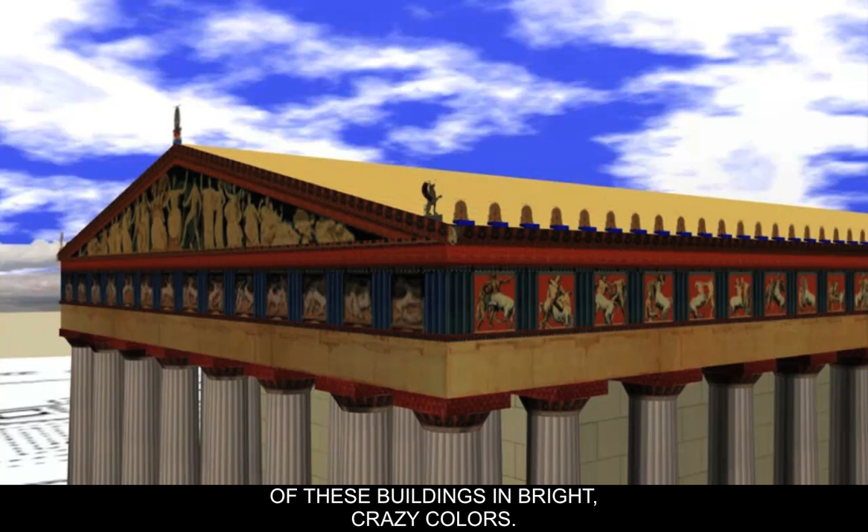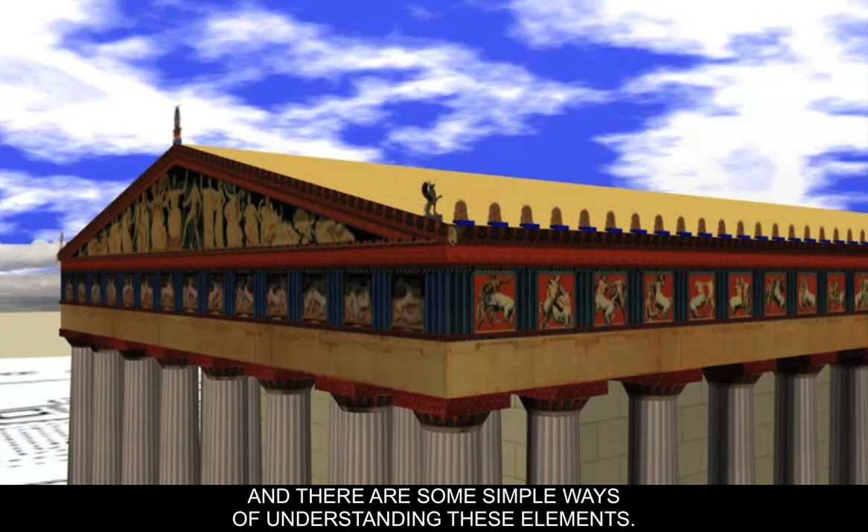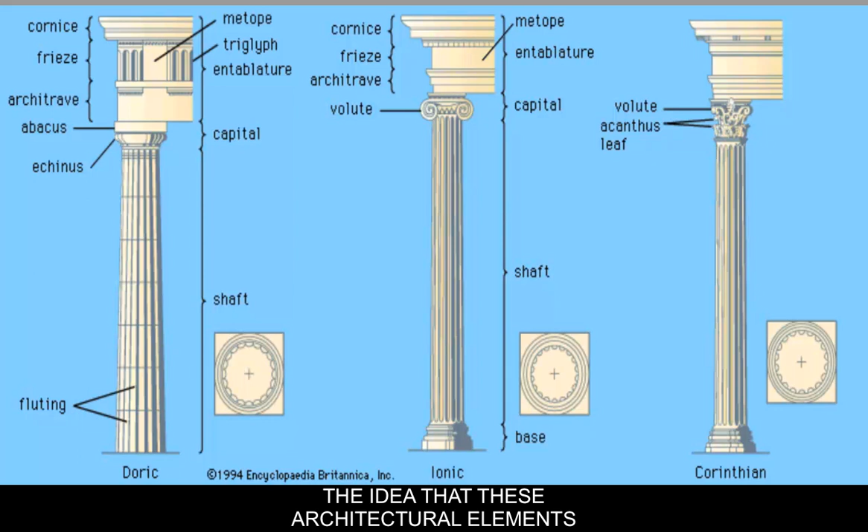So in order to understand the classical Greek world, we need to take a look at some of the architectural elements. And there are some simple ways of understanding these elements. Now, the diagram we're looking at is really important. These architectural elements are things that you have to memorize for your class, and they will give you a lot of enjoyment when you're looking at things later. I know that you probably don't want to hear that, but first of all, we have three main architectural orders.

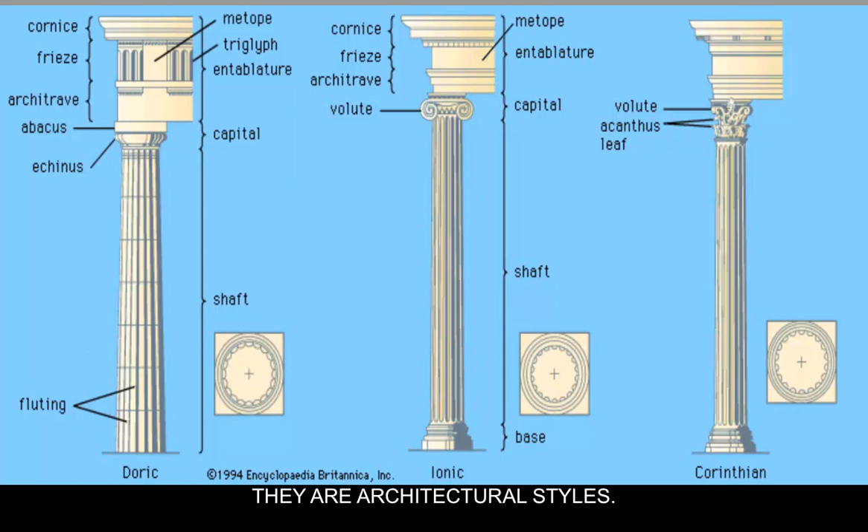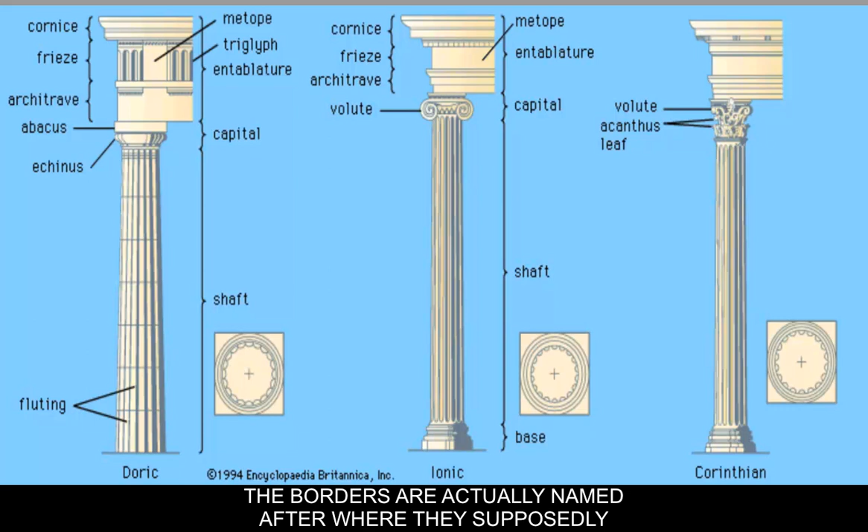They are architectural styles, and the term for column in the Greek and in the Latin world was stylos, S-T-Y-L-O-S. And that's where we get our word style. So these are styles of columns. The orders are actually named after where they supposedly came from: Doris, Ionia, Corinth. Those are names of places.

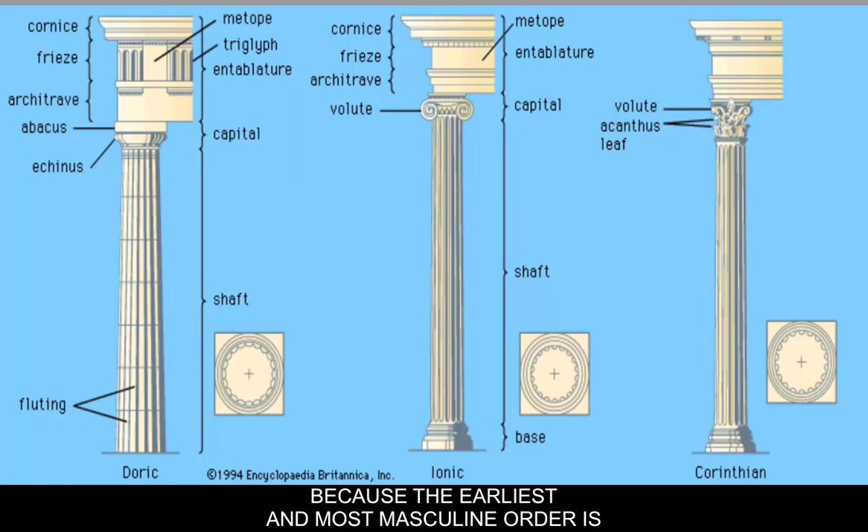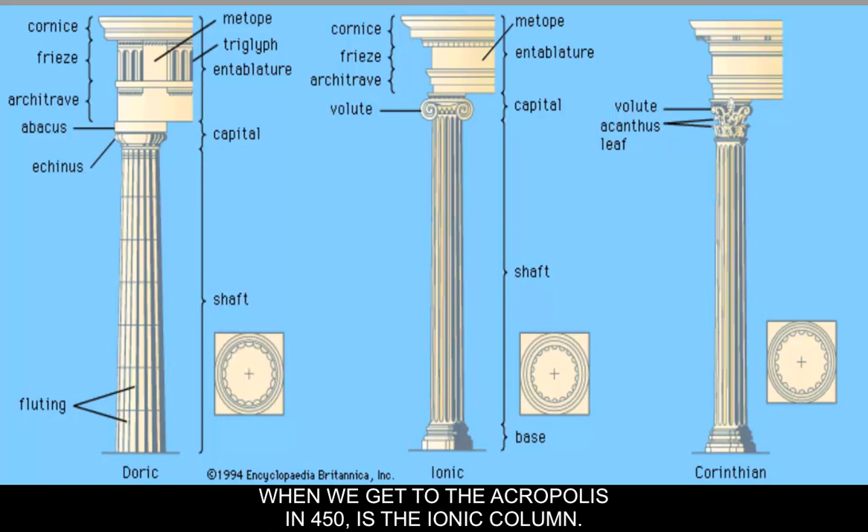Now, this also shows kind of an evolution, because the earliest and most masculine order is the Doric order. The later kind of column that we see, especially when we get to the Acropolis in 450, is the Ionic column. And then much later, around 350, we have the Corinthian order, which is really over the top and has a fancy sort of capital on it. So let's analyze these things and talk about them a little bit.

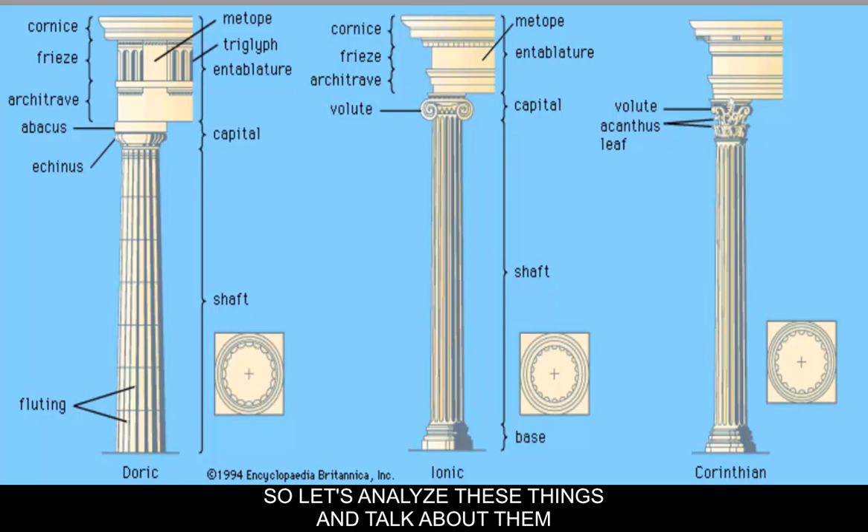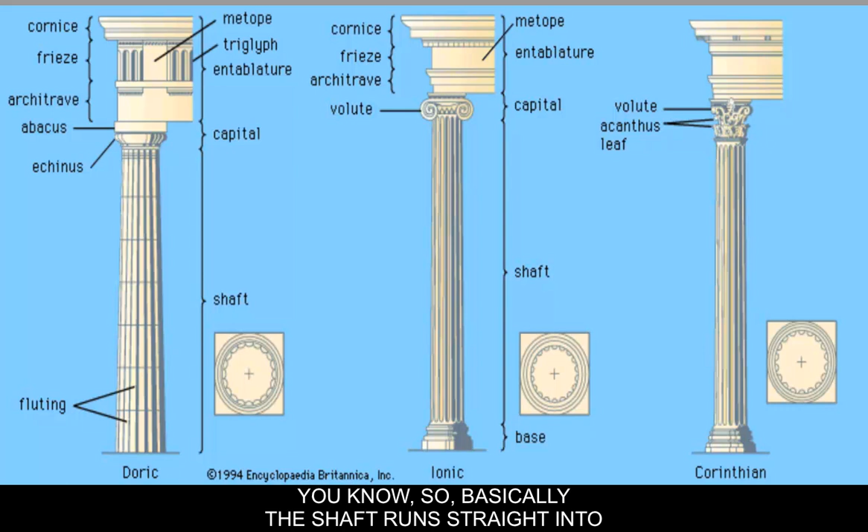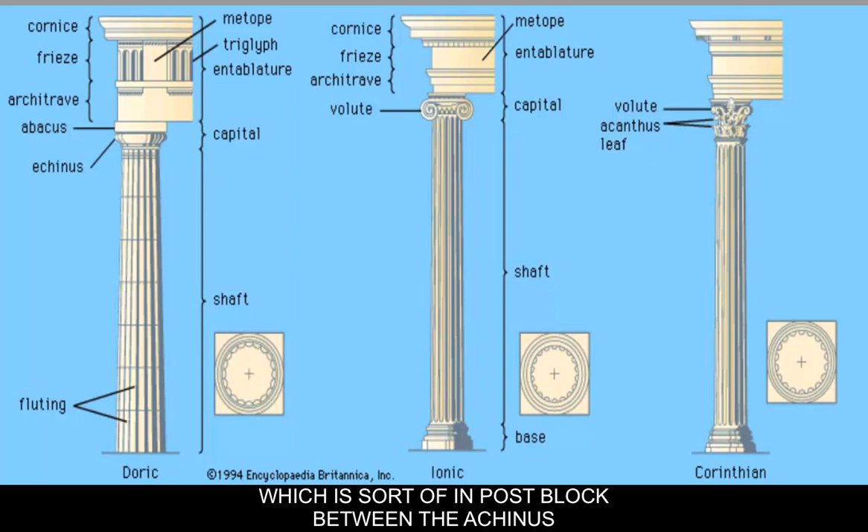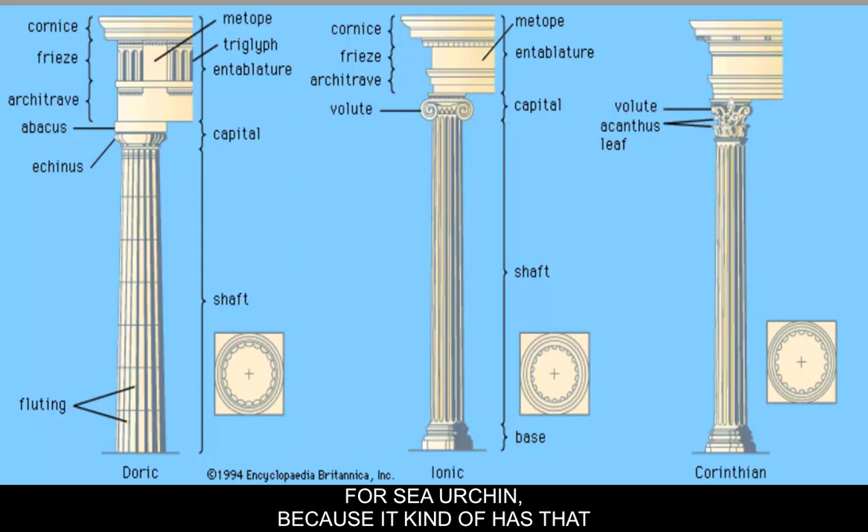First of all, the Doric order. It's the simplest and most masculine. It doesn't have a base, it doesn't have any shoes on it, so basically the shaft runs straight into the base of the building, called the stylobate. At the top, it has something called a capital, and the capital is made out of an abacus, which is a sort of impost block between the echinus and the architrave. The term echinus comes from the Greek word for sea urchin, because it has that look of the half dome of a sea urchin.

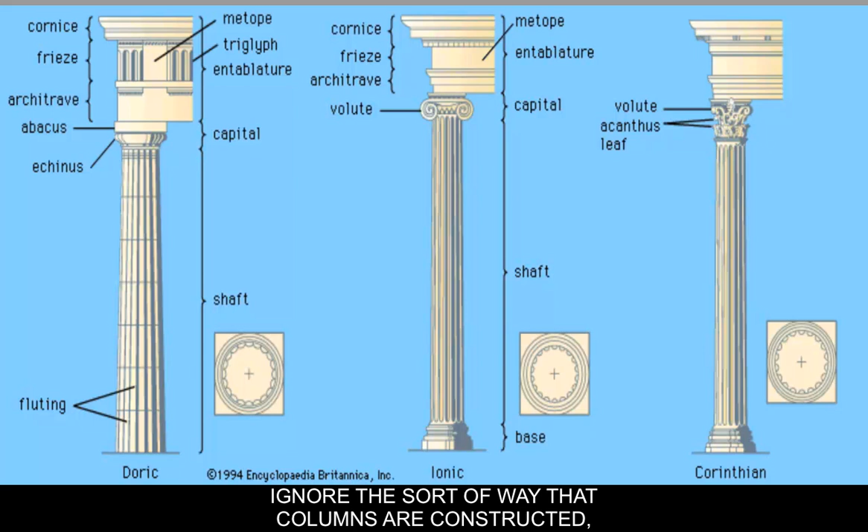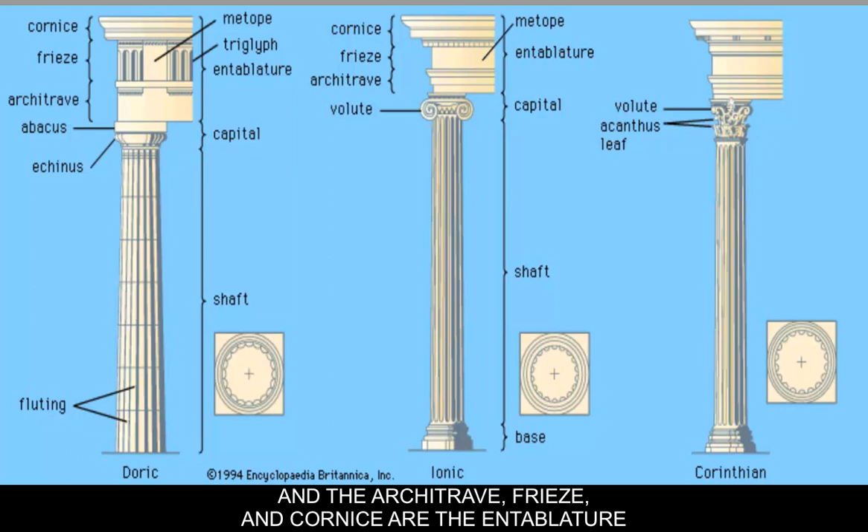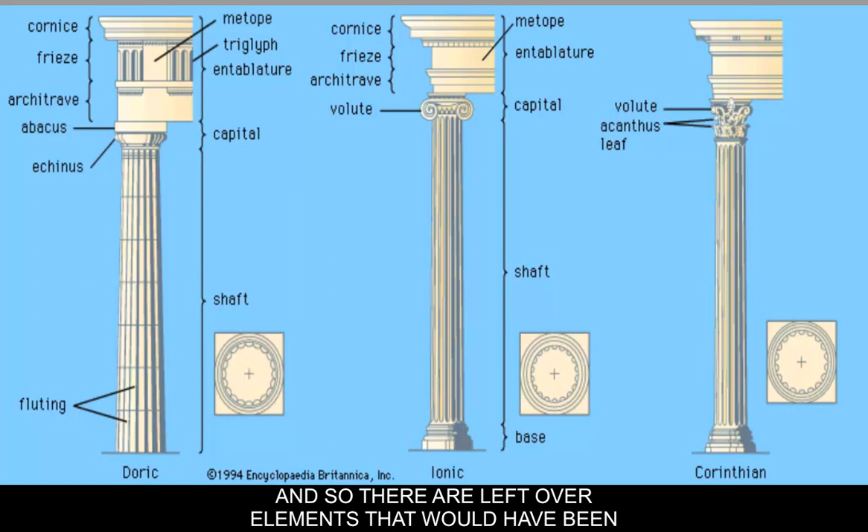And usually the columns have fluting, which allows you to ignore the way that columns are constructed, which is out of drums. Above that, you have a horizontal beam that's called the architrave. The architrave, frieze, and cornice are the entablature of the building, and they have a lot of the ornaments on them. Originally all of these ornaments would have been made out of wood, so there are leftover elements that would have been useful in wooden form but are no longer useful now.

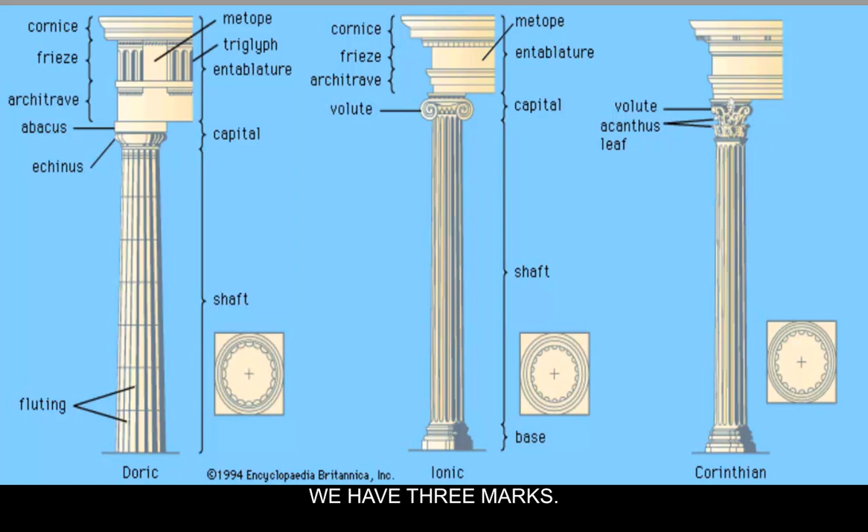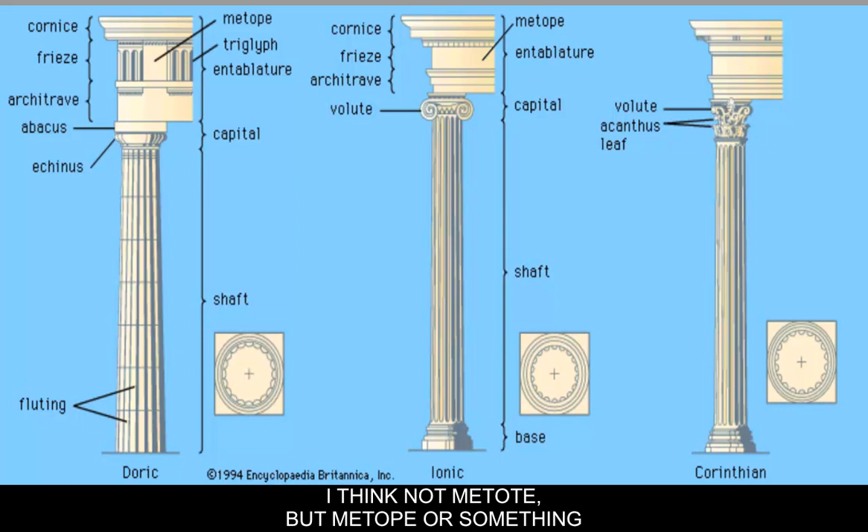So for instance, the triglyphs that we see: tri means three, glyph means mark, so we have three marks. That would have been the end of actual wooden beams. And the thing between them is called the metope; you may hear a different pronunciation of that.

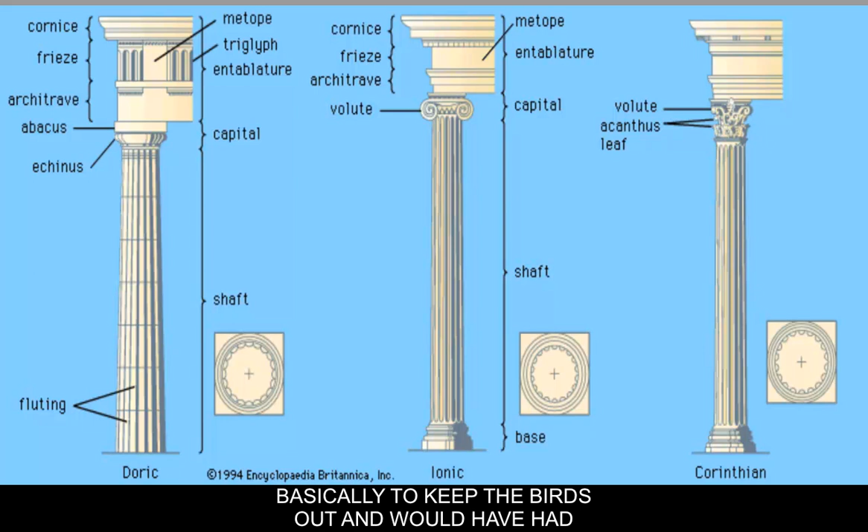But the metope, actually, in original Greek buildings would have been a ceramic panel that was used just basically to keep the birds out and would have had decorations and paintings on it. So we've got this very simple early order, the Doric order, and that was used for the Parthenon.

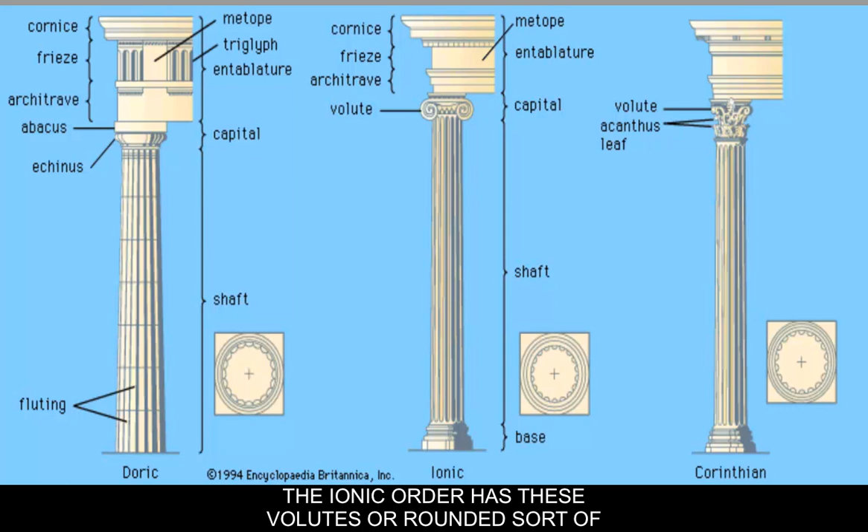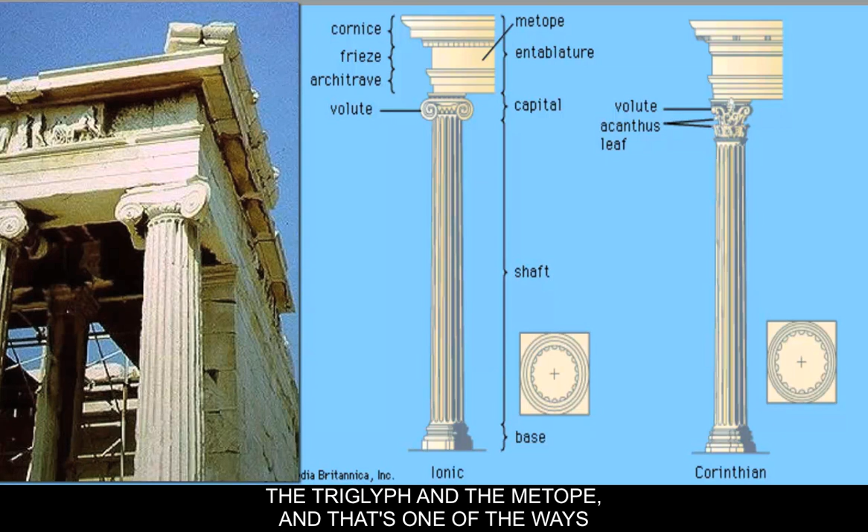The Ionic order has these volutes, or rounded sort of shapes on it, and those are in the capital. And you can see that the entablature of the Ionic order is a little bit fancier. It has some extra little elements in it, but it's missing two of the elements that we saw before, the triglyph and the metope. And that's one of the ways that you can tell that it's got an Ionic entablature on the top of it.

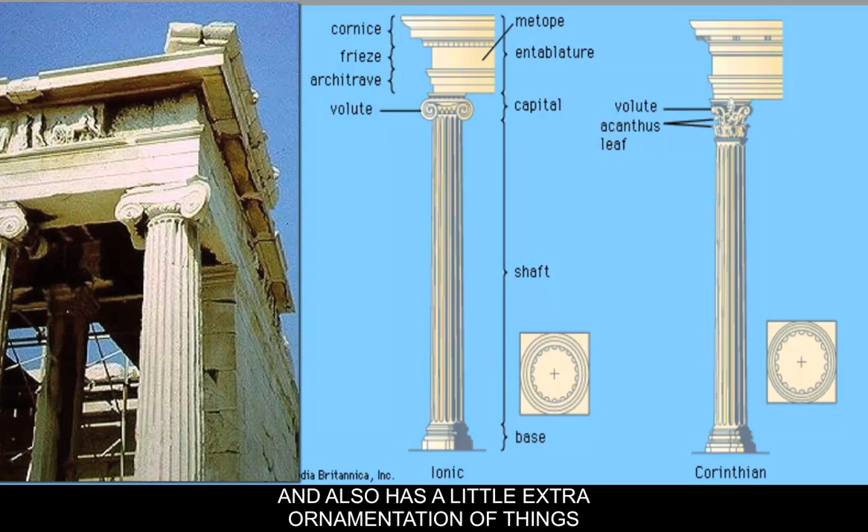The capital of the column has those volutes and also has a little extra ornamentation of things that look like little eggs and darts that run between them. And then it's actually wearing a pair of shoes, or it's got a base on it. And so it's considered sort of a feminine thing. And the way that I've always remembered it is the volutes make it look like the capital letter I, so it's Ionic.

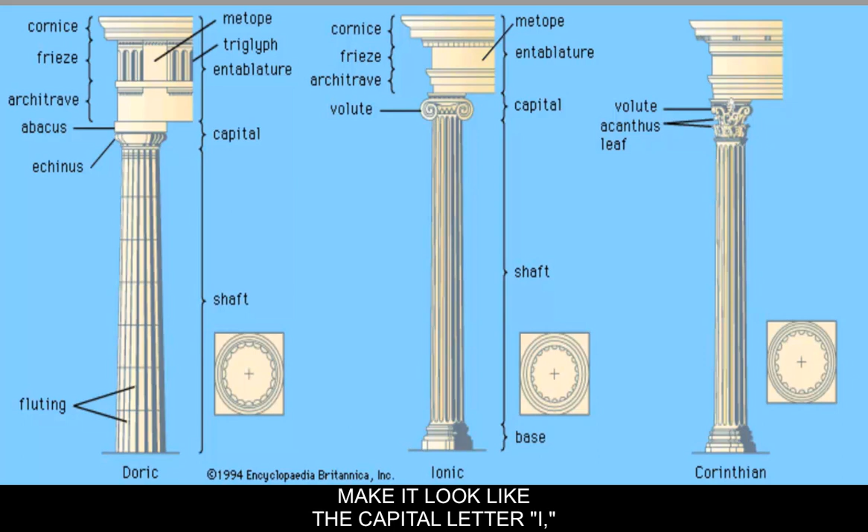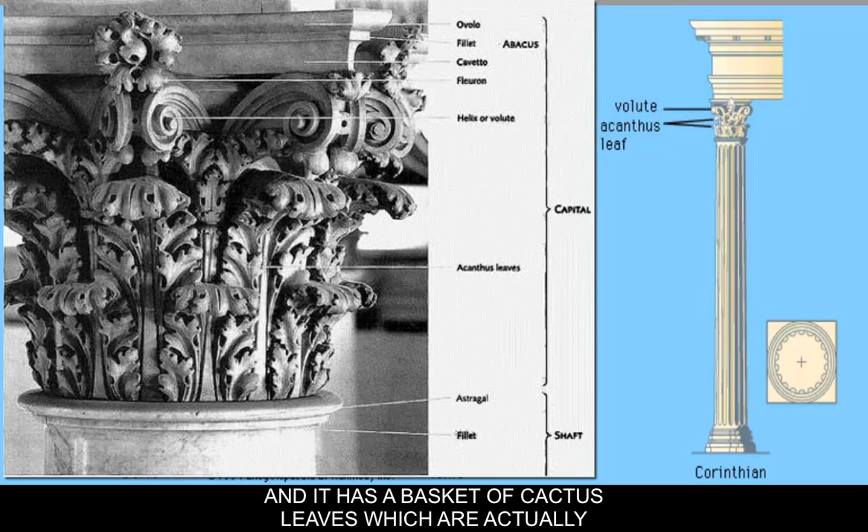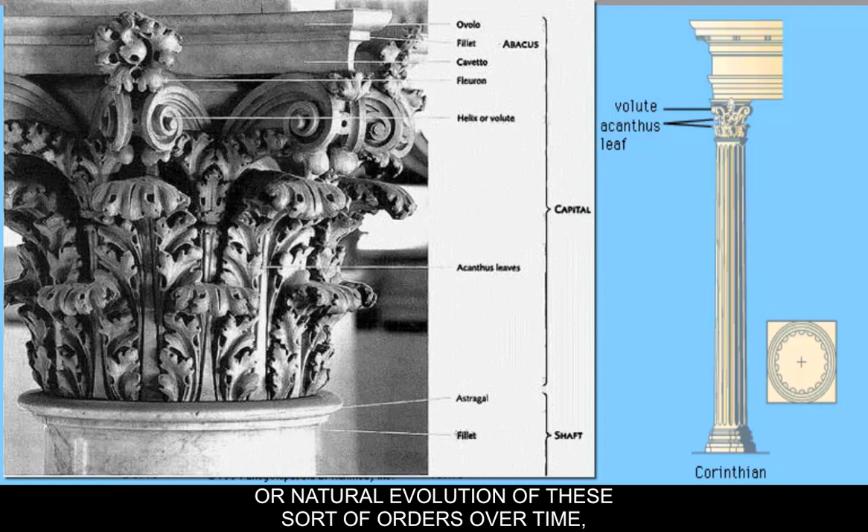The Corinthian is kind of the RuPaul or Carmen Miranda version of the orders, because it comes much later, in the Hellenistic period, which makes a lot of sense now that you know about Hellenistic sculpture. And it has a basket of acanthus leaves, which are actually sort of dandelion greens. You can make a salad out of it, and it has some vestiges left over of a curlicue hair design in the volutes at the top as well. So we can see that that's a natural evolution of these orders over time, and generally historians kind of give them a gender.

Now, the next idea that is important in the classical Greek world, besides what we talked about with Plato in the sculpture lesson, is that we get a lot of our mathematical ideas and a lot of our philosophical ideas from ancient Greece as well. So Pythagoras, I think it was a squared plus b squared equals c squared, the measurements of the triangle and those kinds of things. He's this mathematician, and if you look at his dates, he comes from well before Plato. Plato is much later, like about 200 years later.

So Pythagoras comes up with this idea that numbers are divine for him. Numbers are a representation of the rational world, but underlying the world we live in is this system that's almost godlike, and that runs under everything. He called this symmetria, and that makes a lot of sense. We've kind of taken the term symmetria and distorted it a little bit. But the idea of symmetria for us, or symmetry, is same measurement. Sim meaning the same, metros meaning measure.

And so if you look at this building, the Parthenon that we're going to study in depth, it's symmetrical. You can cut it down the center and it looks completely equal on either side, at least in the front part. And so that symmetry is a beautiful idea, and therefore kalos is involved in this. The other thing that they would have found beautiful about it is also some of the ways that numbers are used to alter your perception. So for instance, the front of the building has 8 columns across the front. Now the long side of that building has actually 17 columns.